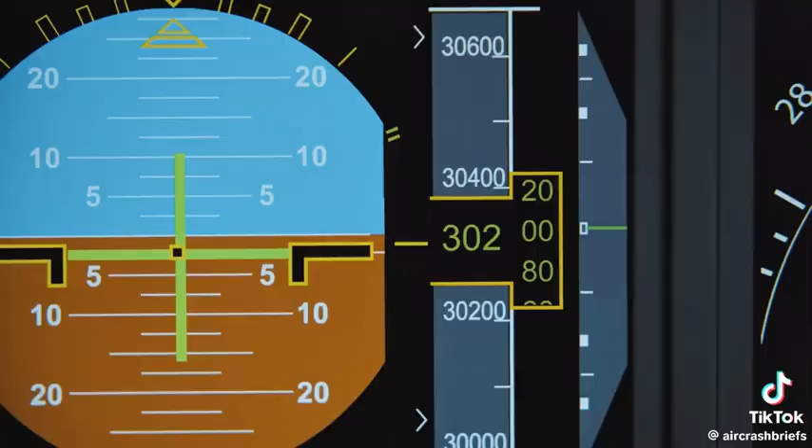165 miles from Hong Kong Airport, the Airbus leaves cruising altitude and begins its descent. The aircraft is performing perfectly, and then something goes wrong. What the hell was that?

The flight computer alerts the pilots to a problem: engine 2 stalled. The plane's monitoring system indicates there's an issue with the right engine, engine number 2.

Captain Waters reduces power on the engine to idle to protect it from damage, the lowest possible level while still keeping it running. It has an immediate effect — the engine noises disappear. Without thrust from the right engine, the pilots are now relying exclusively on the left engine to get them to Hong Kong.

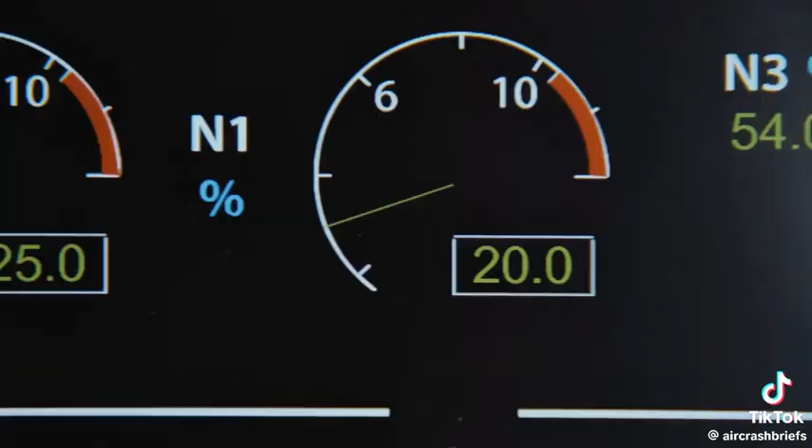But as the flight crew prepares for landing, the left engine, engine number 1, also fails. Engine 1 stalled. Both engines are now still running, but producing no thrust. The plane is gliding. Without thrust, they won't make it to Hong Kong or any other airport.

Despite several attempts, the pilots cannot get the engines to produce power. The pilots confront the grim prospect of ditching in the South China Sea. I'm calling a Mayday. Do it.

First Officer Hayhoe begins preparing to ditch the plane. Then Captain Waters gets an idea. Okay, try slow movements. Go slowly. Just ease in fuel. Easy does it.

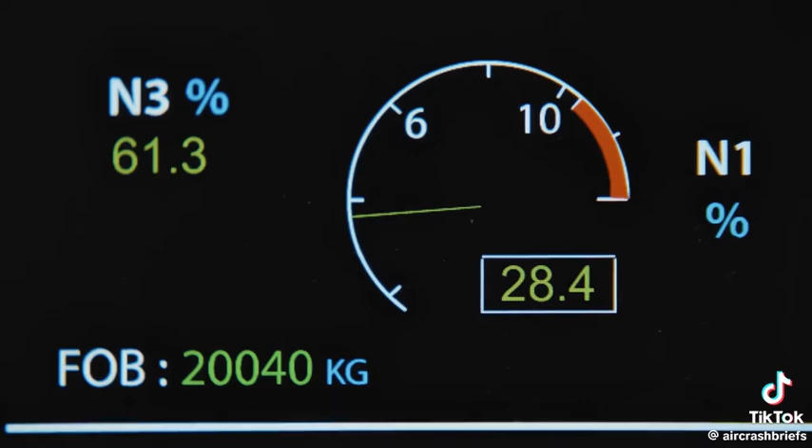Incredibly, it seems to be having an effect. Rotation increasing in engine 1. Captain Waters realizes that the engine won't go any higher than 74% power.

With one engine working, the pilots can now attempt a landing at Hong Kong Airport, but there's no margin for error. Okay, flaps 1. Gear down. Gear down.

The safest plan is to get the plane 5,500 feet from the ground, then pull engine 1 back to idle, reducing speed and altitude, in preparation for a gentle glide onto the runway.

But just 1 minute from touchdown, an overspeed warning sounds, a signal the aircraft is flying too fast. They should be slowing down, but engine 1 is still running at high speed, too high to land safely.

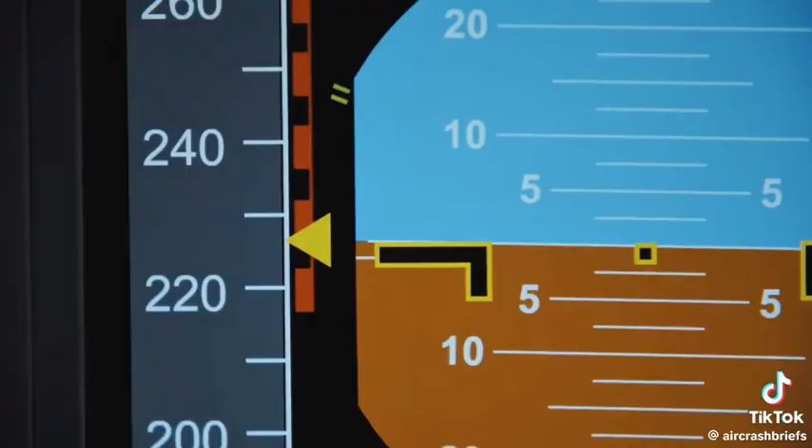The pilots have no choice but to risk a high-speed landing on a runway at the edge of the ocean. Too low. Terrain. Pull up. Going 100 knots faster than normal, Captain Waters pushes the nose down, forcing the Airbus onto the runway. Brace. At the end lies open water.

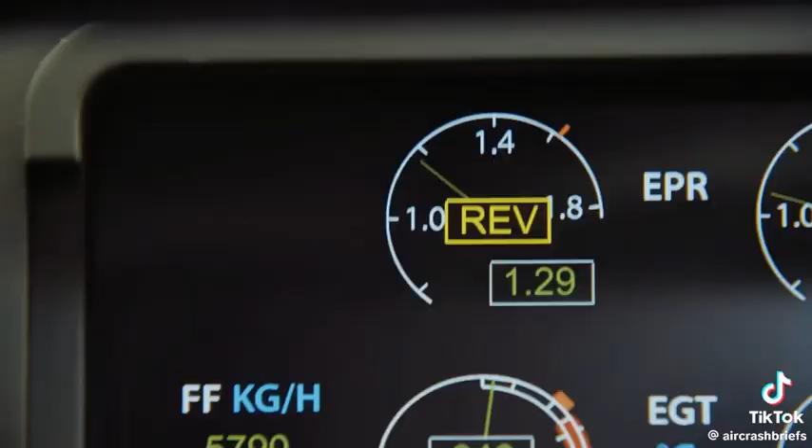The crew deploys reverse thrust and applies full braking power to avoid overshooting the runway. No number 2 reverse. No decel. Just one faulty engine is providing reverse thrust.

Cathay Pacific Flight 780 screeches to a halt just a few thousand feet from the end of the airport's runway. We made it. Nice one. The passengers and crew evacuate safely with only a few minor injuries.

Hong Kong's Civil Aviation Department immediately launches an investigation. Because the plane's Trent 700 engines were made by British company Rolls-Royce, Anne Evans of the British Air Accidents Investigation Branch joins the investigation. Investigators look to the plane's flight data recorder for answers.

They start with the A330's engine functions. Stop. What's going on here? Right away, they notice something unusual: thrust levers are moving, but fuel flow's flatlining.

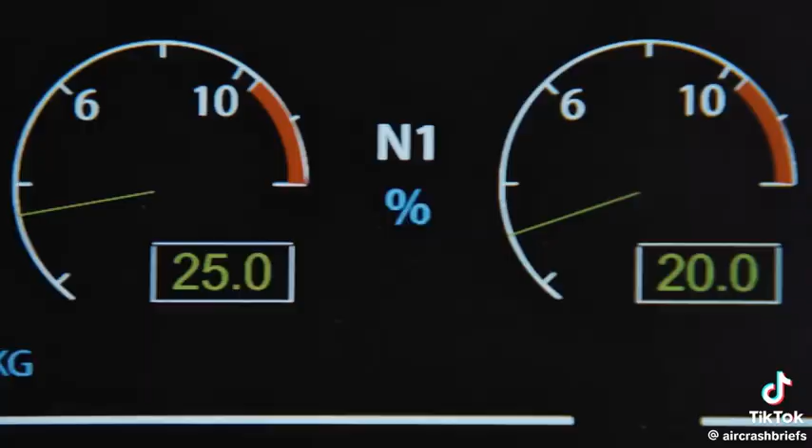Right after the pilots tried to restore power to the engines by pushing the throttle up, the fuel flow remained the same. Investigators wonder if a fuel flow problem caused Flight 780's engine trouble.

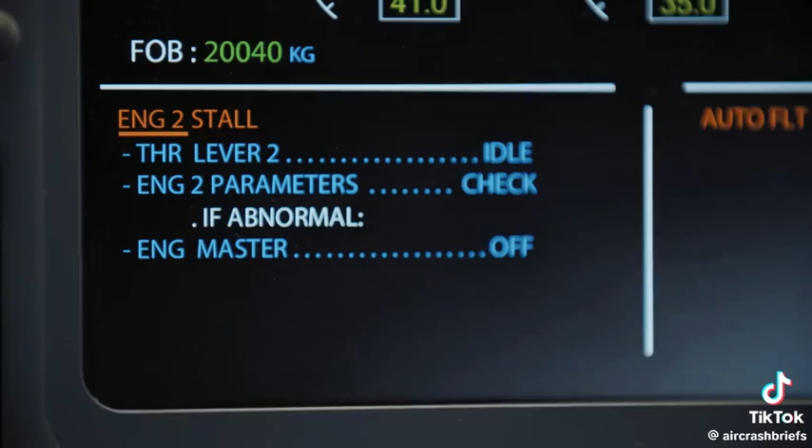Evans turns to the plane's in-depth data logs. They explain in detail the error messages that appeared on the monitoring system throughout the flight: engine 2 control system fault.

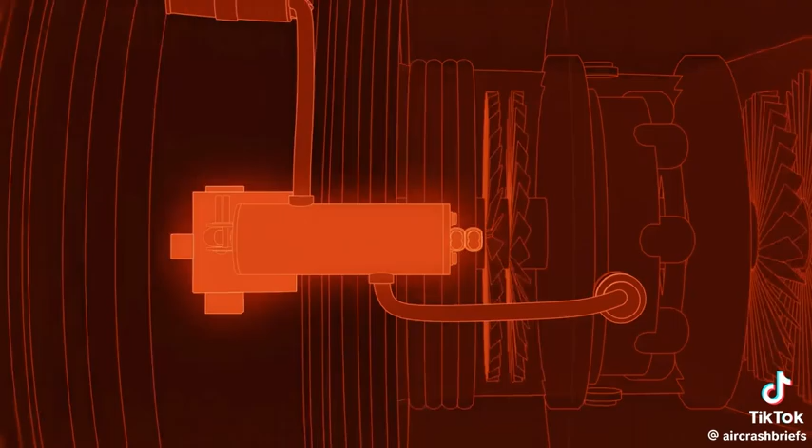Anne Evans discovers that early in the flight, the computers detected a problem in a key part of the fuel system called the main metering valve. The main metering valve is made up of a piston that slides within a cylinder. When the pilots move the thrust levers, it increases or decreases the flow of fuel to the A330's turbofan engines.

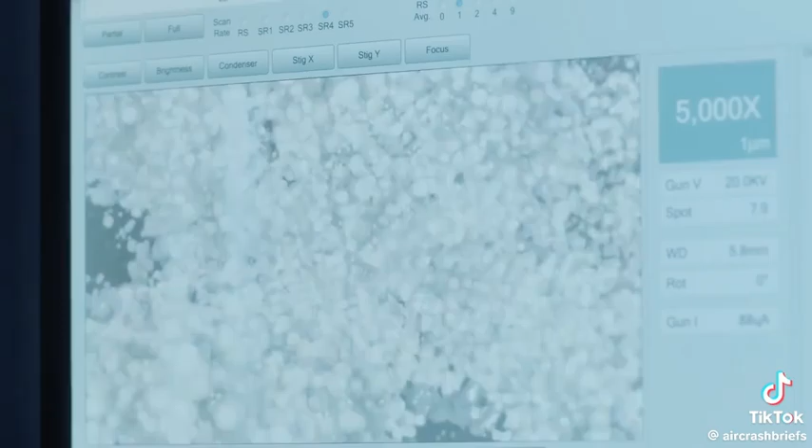When investigators cut the valve open to study it, they find something they've never seen before. Microscopic analysis reveals that the powder is a type of superabsorbent polymer, or SAP, made up of tiny spheres. The powder is used in refueling trucks to prevent water from getting into the aircraft's fuel tanks.

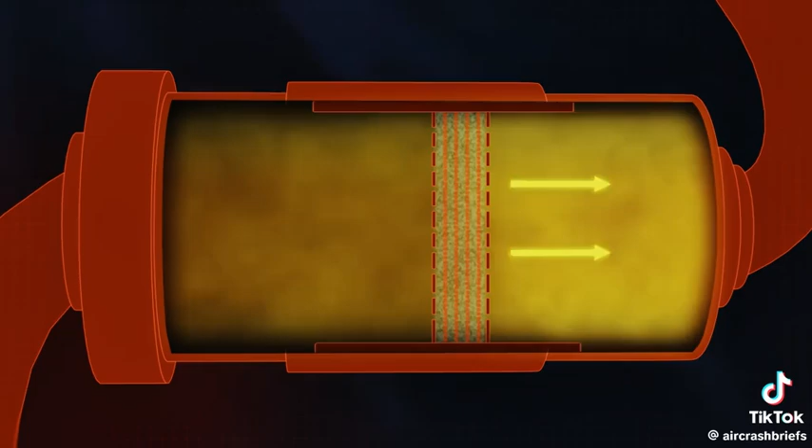The refueling trucks pump fuel from underground tanks and pipes through a filter on the truck and into the aircraft. If the fuel is contaminated with water, the powder in the filter absorbs it by forming a gel inside the filter. But the waterlogged gel is supposed to stay in the filter — it should never end up in the fuel.

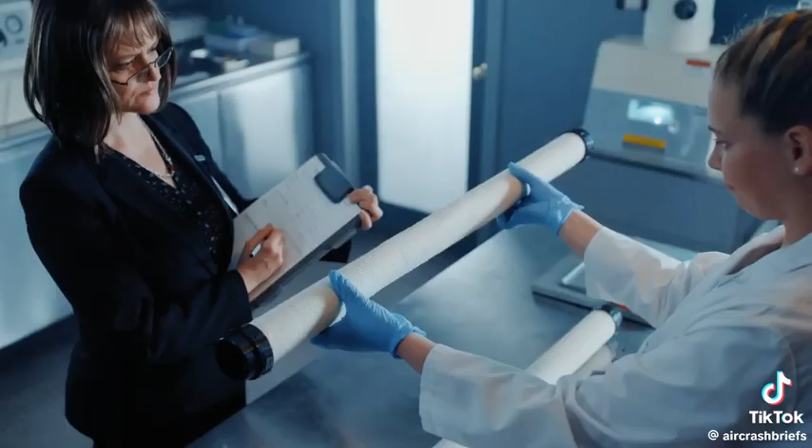Investigators recover the filters from the truck used to refuel Flight 780 at Surabaya Airport. And when they examine a sample of the filter under a microscope, investigators make a puzzling find: the powder spheres are encrusted with salt.

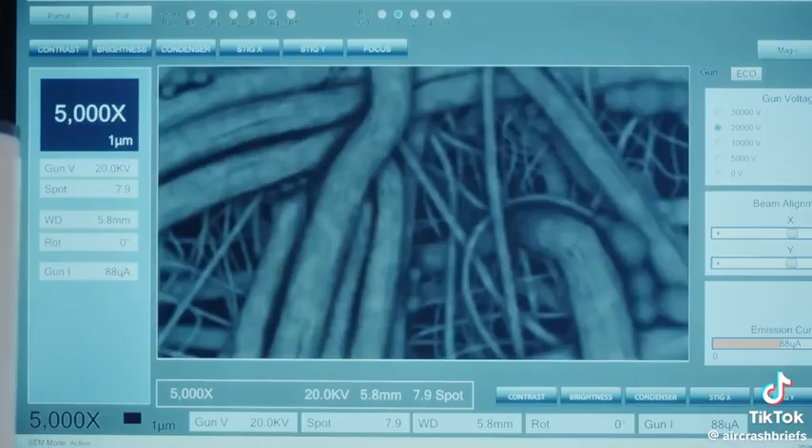When Anne's team conducts tests on fresh filters, exposing them to salt water, the filters collapse, just like the ones used to fuel Flight 780, allowing both the salt crystals and white powder spheres to pass through. Investigators now believe salt water collapsed the fuel filters, leading to powder contamination in the fuel system of Flight 780.

But one critical question remains: how did salt water get into the fuel system?

After a careful review of the fuel system at Surabaya Airport, investigators make a stunning discovery. The fuel system is located close to the sea, and during a recent upgrade, the open fuel pipes were possibly exposed to groundwater. Investigators now believe they know what happened to Cathay Pacific Flight 780.

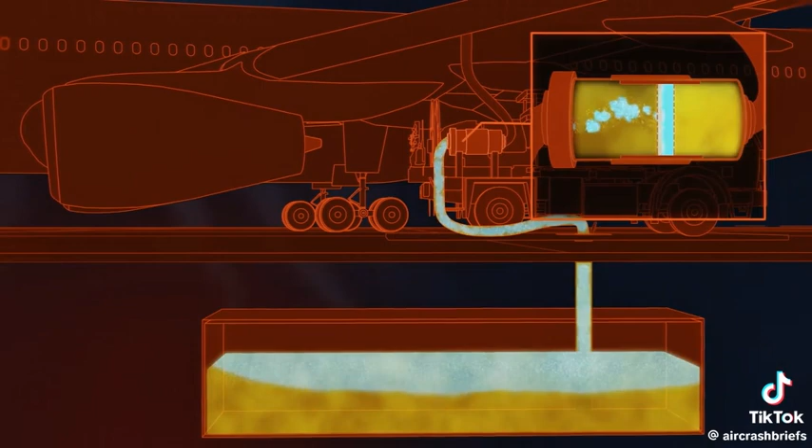The underground fuel supply, contaminated with salt water, broke down a filter, releasing a powder into the fuel. The powder jammed the metering valves, preventing enough fuel from reaching the engines.

Engine 1 stall. Investigators believe Captain Waters was able to restore some thrust in engine number 1 only because its fuel metering valve wasn't yet completely jammed. Only a small trickle of fuel was getting through.

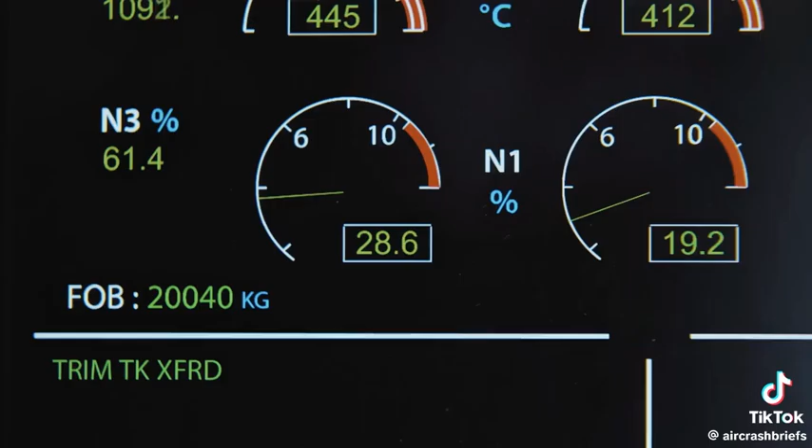Slowly, come on. Once the spheres jammed the valve, it was stuck open, forcing Captain Waters to make the risky high-speed landing. Expert piloting brought Flight 780 safely to the ground.

Since the accident, there have been efforts to improve the regulation of aviation fuel handling and storage. Manufacturers have designed the filters to prevent collapse and powder contamination. The crew's heroic efforts in the face of engine failure save Cathay Flight 780 from all but certain disaster.